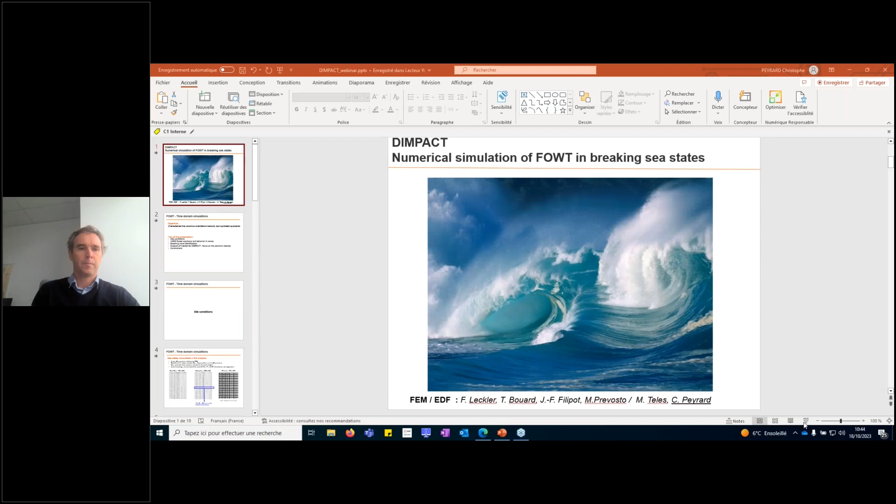Yes, I should. Do you see my screen? Yes, perfect. Thank you. Go ahead, Christophe. Thank you.

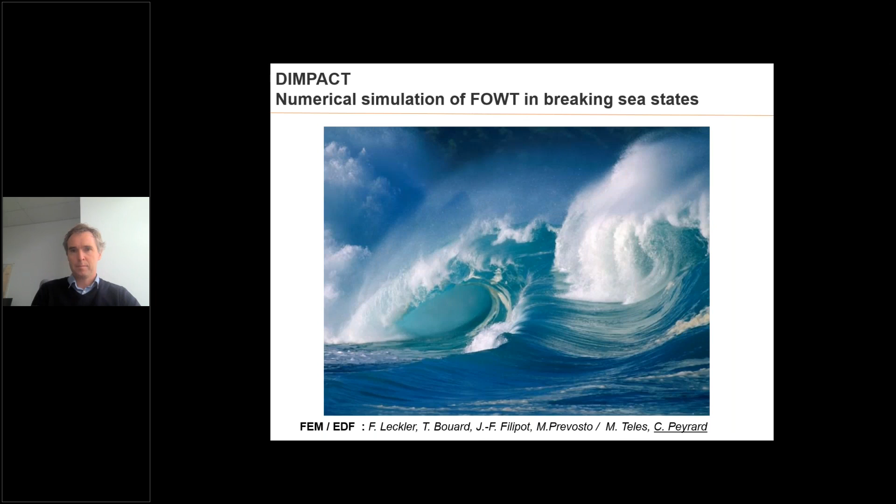And here I will present you a work made with my colleague Maria Teles and also colleagues from France Énergie Marine. The objective of the work is to talk about the behavior of floating wind turbines in high seas, generating breaking wave loads.

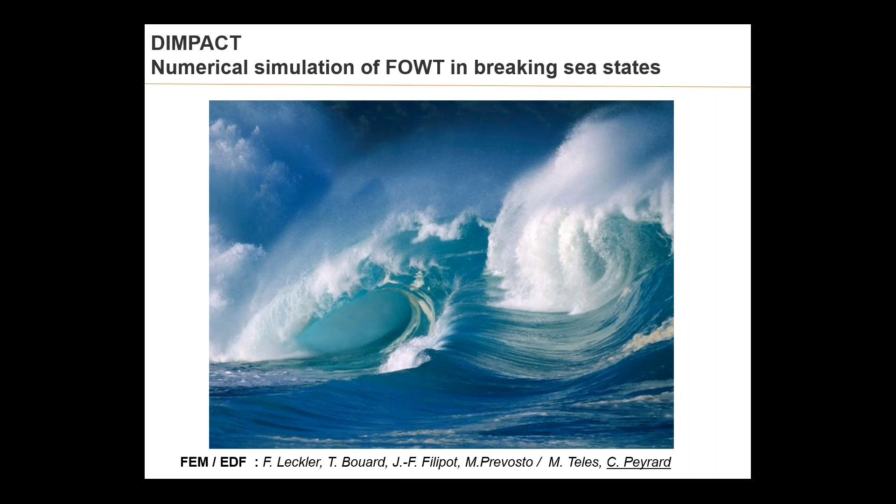Here, what we were interested in was to characterize the orientation and the velocity of the vertical columns that compose a floater when they are submitted to breaking wave loads, in order to see what is specific to floating wind turbines as compared to the work already done on bottom fixed structures.

So my presentation will first consist in giving you some idea of the site conditions we have considered in the DIMPACT project. Then I will explain the 10 megawatt systems that we have investigated to characterize the response of floating bodies in waves. After that, I will move to the breaking wave identification. So I will present a strategy that was used at the early phase of the project to detect breaking waves. And after that, I will focus on some outputs of the study.

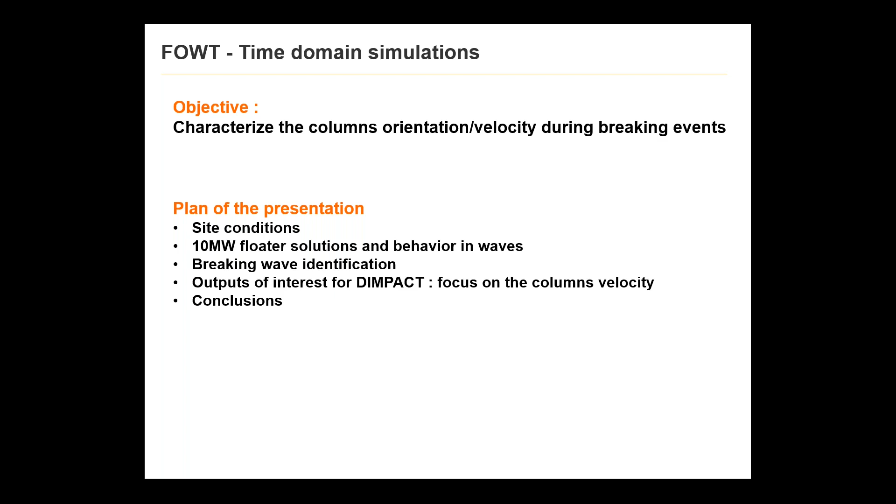I will not show the study of all parameters, but I will focus on the velocity of the columns, which is, I think, quite specific to floating wind. So let's start with the site conditions.

So we have investigated 3 site conditions within DIMPACT and looked at the 50-year contours in order to capture the most severe loads. So we looked at the Mediterranean Sea conditions, which is south of France, so mostly calm waters, but sometimes quite steep. We have looked at the Met Centre conditions in Norway. So the Met Centre is a demonstration site where Zephyros, for example, is installed, or TetraSpar. And last, we have considered the Brittany conditions, so west of France in the Atlantic, so quite a severe site.

And what we did is that we extracted from the 50-year contours the steepest conditions, and we made numerical simulations of the sea states. Quite a lot of simulations, I would say, because we needed to have statistics about the response of the floaters. So I will come back on these points later. But basically, what we tried to look at was the potential misalignment between wind and waves, given a steep sea state.

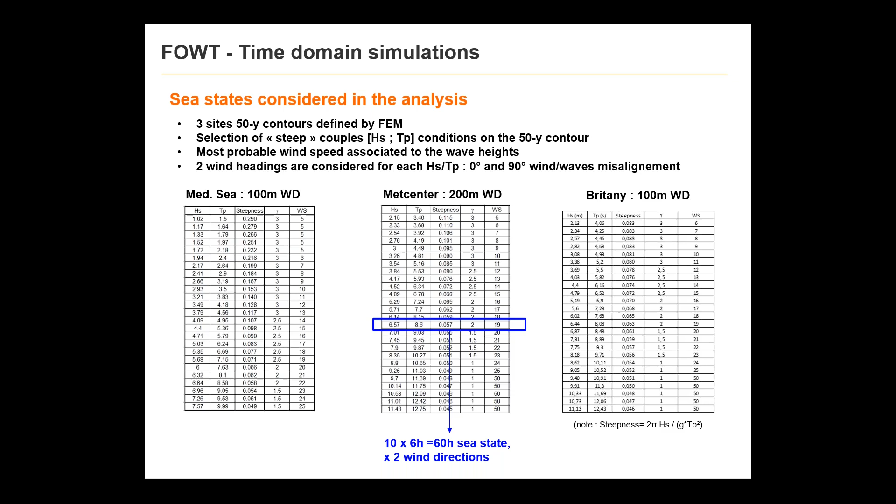Now let me present you the floaters and their response in waves. So within DIMPACT, we have investigated 4 floating solutions that are quite representative of the market today. We looked at TLPs, so EDF TLP, an academic design proposed by Milano in 2020, which is quite similar to the Provence Grand Large project that was installed last month offshore Marseille. So what is specific with this turbine is that the lines are inclined, so the motion of the floater is a bit specific as compared to a more classical TLP.

The second TLP we have investigated was an academic DTU TLP proposed by Laugesen and Hansen in 2015. So quite a typical TLP with vertical legs, with a very large cylinder in the middle of the floater. Also, we investigated the Nautilus semi-submersible proposed during the LIFES50+ project, used here without the active ballast activated, and also a spar developed by EDF in 2018, because spars are quite significant regarding the market today.

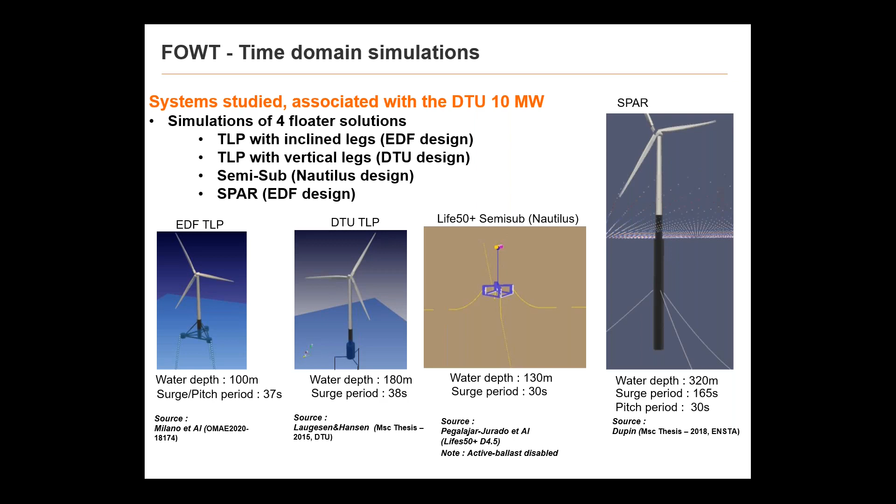So all these designs are applied to the DTU 10 megawatt turbine, the academic and well-known 10 megawatt turbine proposed by DTU. Regarding the modeling assumptions, I will not go into too much detail, but we use quite state-of-the-art methodologies with turbulent wind using TurbSim, irregular waves using the Airy theory, so linear waves with stretching models. The turbine is flexible, so the blade can have a deformation in order to limit the wind loads. The tower is flexible also, the floater is rigid, and the mooring lines can be modeled in dynamic for the TLP or mostly in quasi-static for the spar.

So the study was considering a lot of sea states. We considered 6-hour sea states, about 7,000 sea states for each floater, in order to cover the 3 sites, to have several sea state realizations for each HS-TP we consider, and to investigate also the misalignment between the wind and the wave. So it led to a lot of calculations, but this allows us to have reliable statistics.

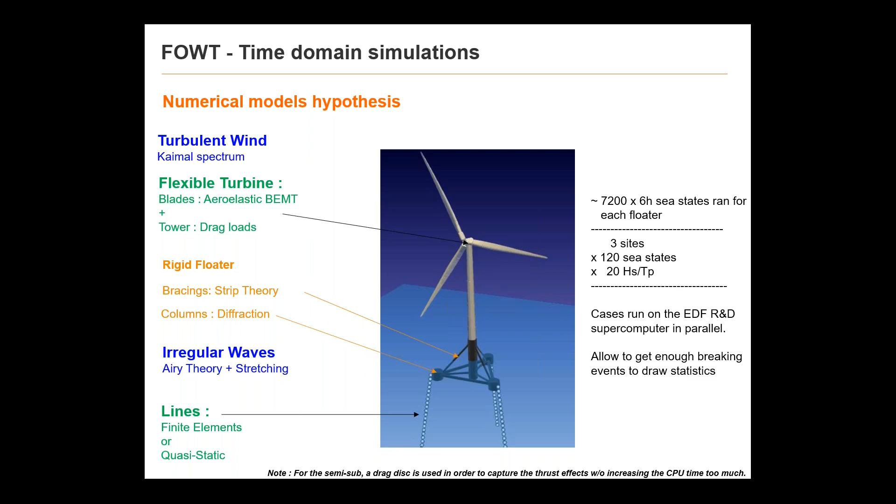And it was not too long to perform using the supercomputer available at EDF R&D. So we think we have a quite representative behavior of the floaters in various environments.

In order to check the relevance of the numerical models, we looked at the production of the turbine, because we realized that a lot of HS-TP couples that we considered were associated with wind speeds allowing for production. So a consistency check for the calculation was to verify that we were following the DTU turbine production curve.

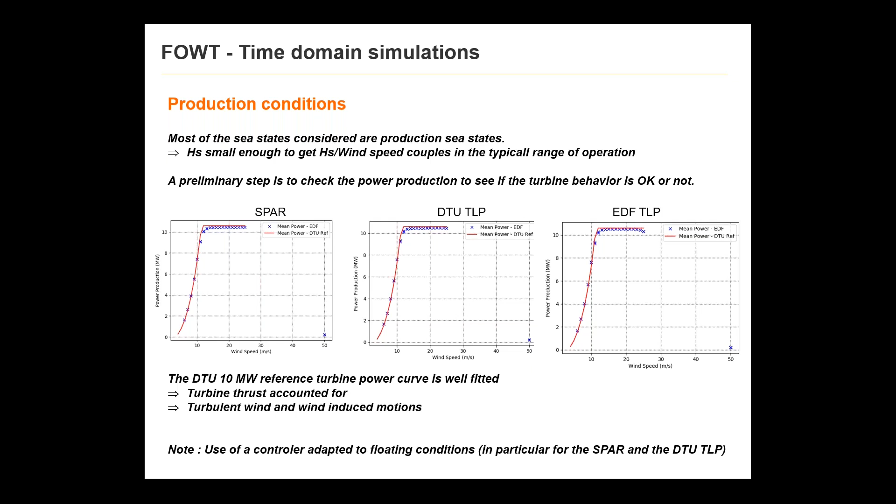What was a bit specific maybe to mention here was the development of specific controllers for the DTU TLP and the spar in particular, in order to avoid the negative damping. So this is something that was done at the very early phase of the project.

Maybe just to give you an idea of the floater response in waves, as I will talk about the velocity of the floater in the rest of the presentation, let me present the horizontal velocity RAOs. So this is basically the velocity at the central column of the spar or of the TLP, depending on the wave period.

And you see that for small wave periods, we have low velocity, so the floater is not responding to waves. And above 10 seconds period, we see that significant velocity appears and tends to stabilize between 10 seconds and 15 seconds for most of the solutions.

And if we look at the right figures, they give us the real and imaginary part of the velocity, the real part being the part in phase with the crest and with the maximum velocity in the crest. We see that the imaginary part is almost zero, and that we have a phasing between the velocity of the column and the velocity of the waves. So this is something that we will explore further in the rest of the presentation.

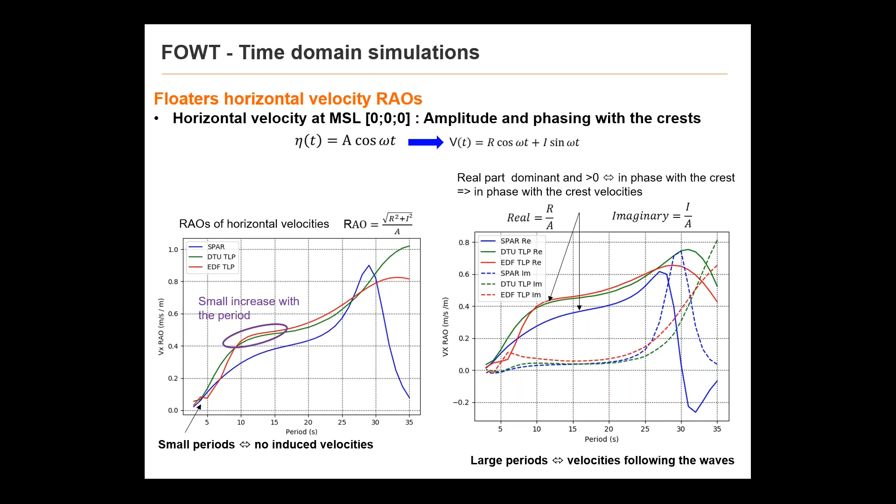Before moving to the results, I just wanted to come back on the breaking wave identification that was used. So it was a strategy developed at the early phase of the DIMPACT project. I believe my colleagues will propose more up-to-date strategies in the other presentations. But basically here, what we did is that we estimated the phase velocity in the crest coming on the column based on the formula you see at the top of the slide.

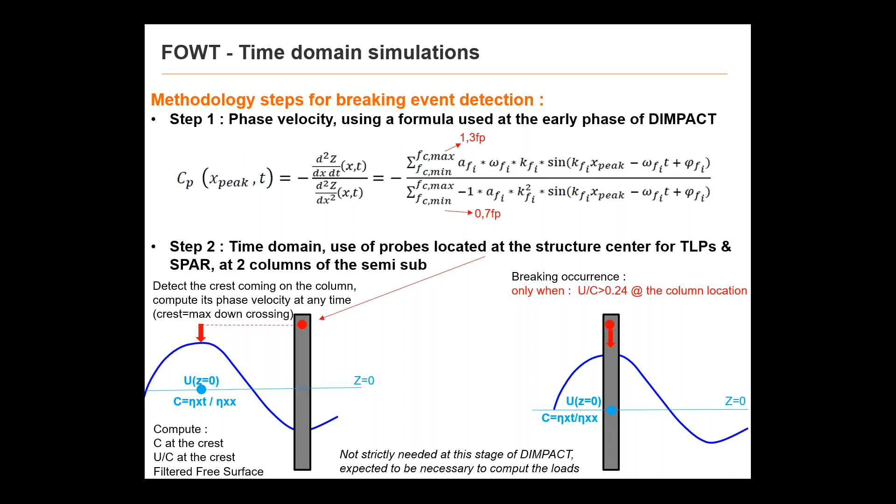And we estimated the orbital velocity in the crest based on the Wheeler stretching, so basically using an elevation that is the mean sea level. And when the U over C ratio, so the ratio between the orbital velocity and the phase velocity, reaches a certain level, we detected the wave as being a breaking wave. And after that, we look at the floater behavior under this specific breaking wave. So that gives us events of breaking that we could analyze.

So I will now focus on some output of interest. At the beginning of DIMPACT, we relied on the literature in order to quantify what is a severe breaking event. We saw that the maximum force will depend on the phase velocity, on the crest height, on the curling factor, on different parameters. So all these parameters were investigated within DIMPACT using the time domain simulation I presented before. What I propose here is that we will just focus on the phase velocity.

And the hypothesis we made at this stage of the project was to say that the relative wave-body velocity will be the governing parameter, instead of using just the crest velocity, as is done for bottom-fixed structures. So I will now move to the results we got for the velocity of the floaters and for the phase velocity.

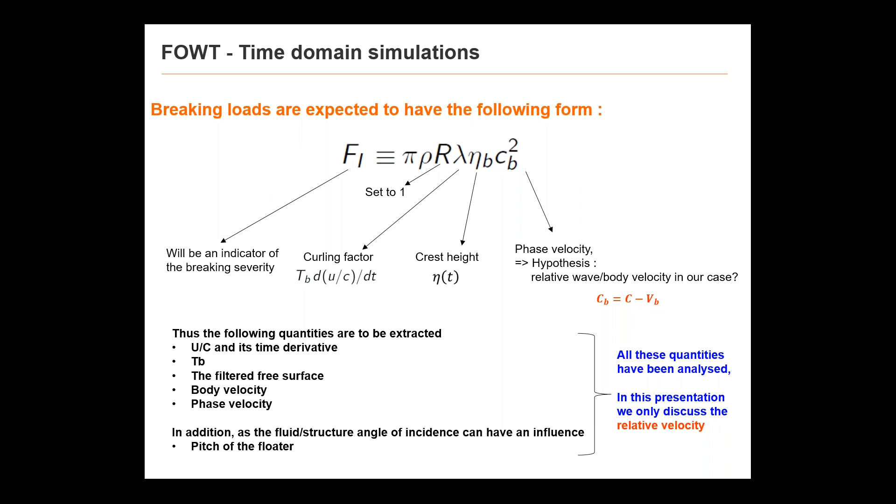So first, if we look just at the velocity of the floaters, here you have some plots with, in green, the density, the probability density of the velocities for all the sea states. In red, you have the velocity for the peak events. So anytime a crest reaches a structure, you decide this is an event and you plot the probability density. And in blue, you have the density for the breaking crest events.

So what we see here is that, of course, when we have a crest, we have a velocity that is shifted as compared to the normal distribution that we can expect from a linear model. But the wave crest in breaking events are even more severe and generating higher velocity for all the floaters we have considered here. So here we see the SPAR, the EDF TLP, and the Nautilus. And we see systematically that for breaking events, the velocity distribution is centered on a higher velocity and explores higher velocity as well.

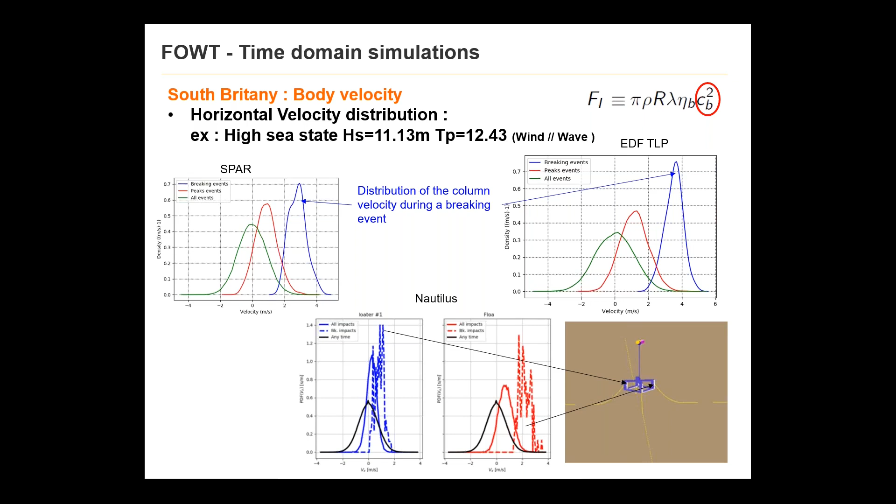So now we are not just interested in the column velocity, we want to look at the relative velocity between the celerity, so the phase velocity, and the body velocity. And here you have some graph giving the body velocity in the x direction and the phase velocity in the y direction. And what we see from the response of various floaters is that we have kind of a behavior with two lines. So the first one being quite steep for small phase velocity. We see that the body velocity does not change too much. So the floater is kind of not moving, not responding to waves.

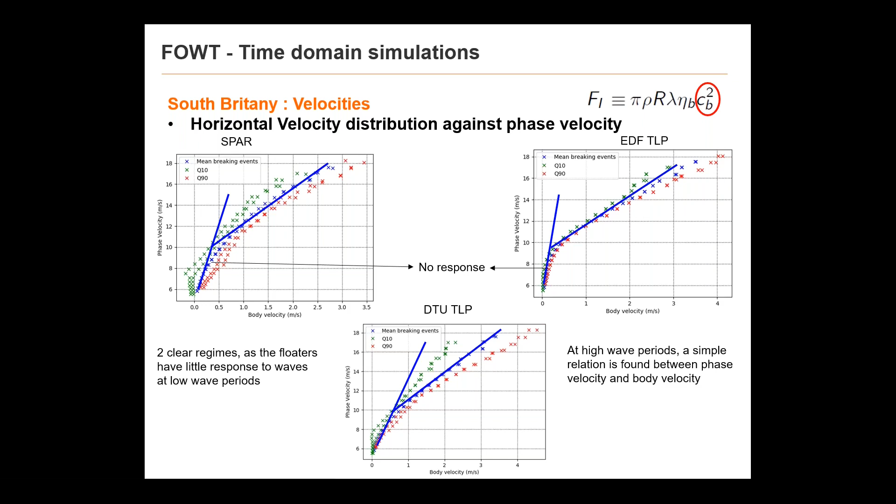And for higher phase velocity associated to longer waves, we see that the floater is responding and it changes the slope of the tendency of the body velocity as compared to the phase velocity. So here we can feel that for very short waves and small waves, we will not have a response of the floater and will mostly consider the phase velocity to characterize the force. But as soon as we have longer waves, we'll have to account for the body velocity. And it seems to be in the same direction as the phase velocity.

So this is something we can see maybe more clearly on this graph. So in this graph, we plot in the x the relative phase-body velocity. So this is the phase velocity minus the body velocity. And in the y-axis, this is the phase velocity alone. And what we see from the different floaters we have studied is that the phase velocity is systematically higher than the relative phase-body velocity, meaning that we can anticipate that the governing velocity that will be used for the force characterization will be smaller for floating bodies than for fixed bodies. And we see that the distance between the phase velocity and the relative phase-body velocity is bigger for bigger phase velocity, so for longer waves.

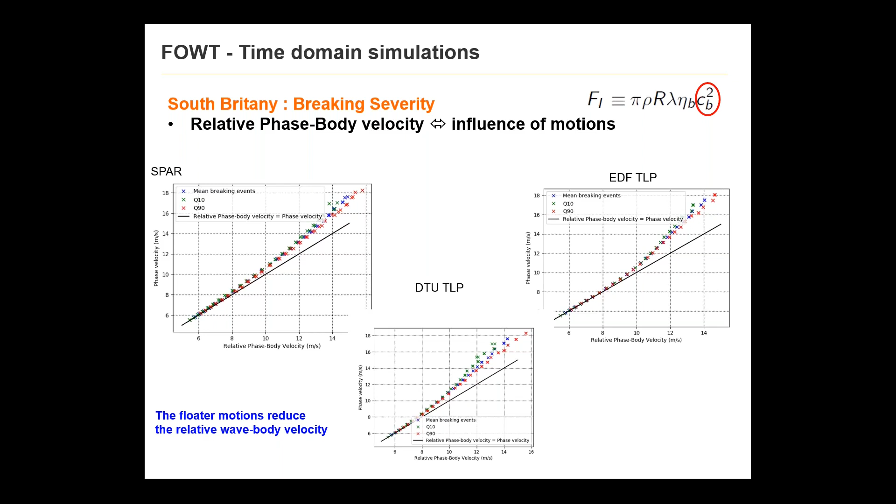So as a conclusion, just coming back on the main results, we have investigated various types of floaters in breaking sea-state conditions. So we have looked at the distribution of various parameters like the breaking crest, the velocity, and we saw that breaking events are very specific and are not just similar to any crest event or any event in the sea state. So we need to investigate these breaking events as a specific kind of event. We looked mostly at the body velocity and at the pitch in the study. The tendency is to say that the relative velocity is lower than the phase velocity, meaning that probably the loads will be reduced. And regarding the pitch, we saw also that we have larger pitch of the floaters for breaking waves as compared to the typical pitch we can have for any crest in the sea state.

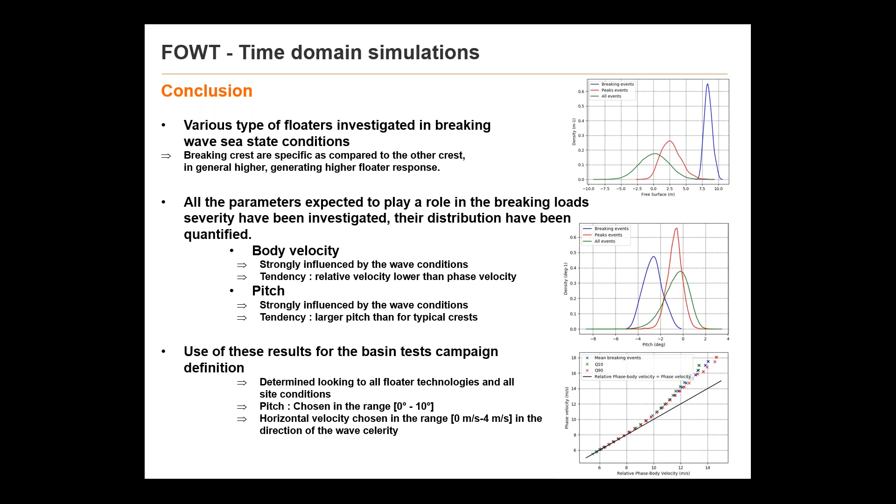So we used the results in order to feed the basin test campaigns. So we determined the range of pitch and the range of velocity we wanted to apply to the basin model in order to investigate realistic breaking configurations in DIMPACT.